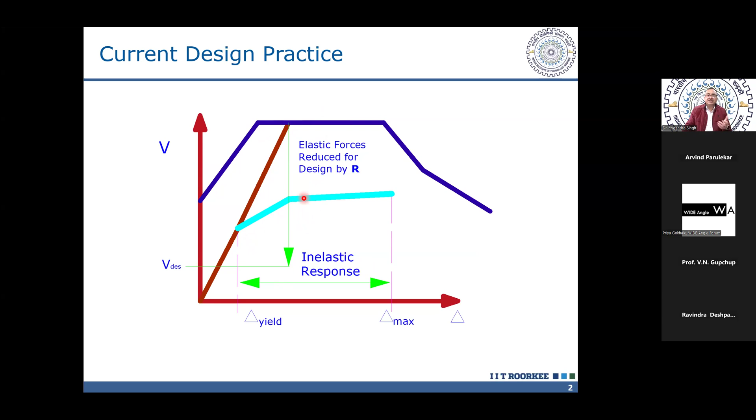So this is going to cause damage in my structure. The problem is that this damage is not known, we can't exactly estimate what will be the level of damage. And that's the limitation of the current method.

If we ask these questions with the current method, there is no answer as to what is the expected performance of the designed structure. I have designed a building following all the procedures of the code, all the do's and don'ts, although those are quite difficult to follow many times.

But even if I have followed all those, and the owner asks me what is going to happen to the building during an earthquake in the future, it is a difficult question for me to answer, because I do not know what performance or level of damage the structure is going to have in a future earthquake.

Then the next question is, suppose I want to achieve a better performance. Currently, what the code intends is that if it is subjected to a major earthquake, the building will get damaged, but it will be at the verge of collapse. It is not going to collapse.

So what we are trying to avoid is the collapse of the structure, because collapse of the building will cause large damage, large loss of life. So we want to avoid large loss of life.

But even when the structure is damaged to such an extent that it is at the verge of collapse, this is severe damage, and there are injuries and some fatalities as well. Only thing is that we are ensuring that the structure is not collapsing. Naturally, this may not be acceptable to many owners if this scenario is explained to them, as to what is expected from the building if it is designed as per code.

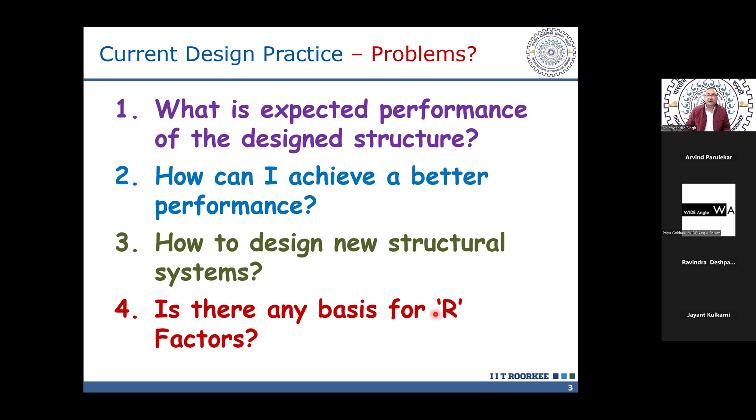These questions can be answered using this methodology, which we call performance-based seismic design, PBSD. In performance-based seismic design, we can target a performance and we can target a hazard. So two parameters we have to decide: one is the hazard level, that is, how strong an earthquake we are going to design for, and then under that earthquake, what level of damage we are going to accept. So one is the hazard level and another is the damage level or the performance level.

The objective of the design is expressed in terms of these two parameters: this performance under this level of hazard. I will explain both to you, how we quantify the different levels of hazard and how we quantify the damage level. Because defining the damage in descriptive terms is easier, but design cannot be done in descriptive terms. We need to define it in terms of some engineering demand parameter. That engineering parameter, which we use to define the damage, is a little more complex. We have to understand - I will give the guidelines, whatever guidelines are available in literature, I will share those with you also. Using those guidelines, we can decide what engineering parameter we can allow if I am targeting a particular level of damage or particular performance level.

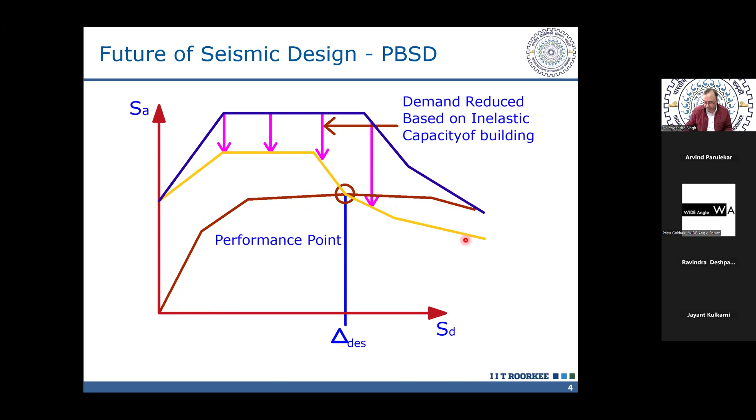So how to obtain this full load displacement behavior, that is actually our objective today.

As I said, in performance-based design, we have a performance objective, and that objective consists of two levels: one is the performance level and another is hazard. So we express a particular performance level corresponding to a particular hazard. And we can have multiple performance objectives also.

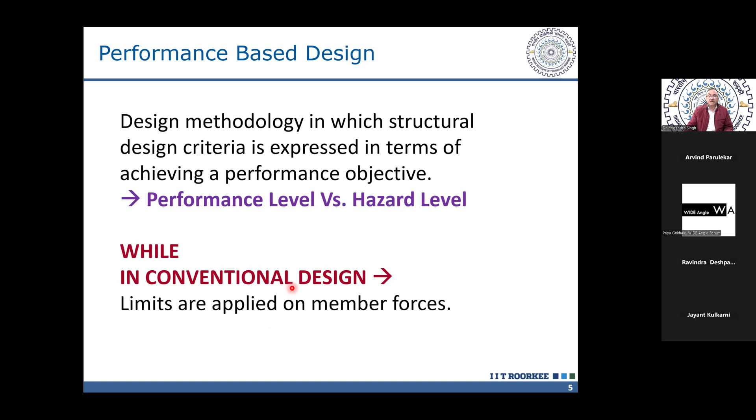I will explain that. In contrast, the conventional design which we are currently following defines certain limits on the member forces. We calculate the demand on the member forces, and that demand is a reduced demand. Then we design our members so that demand is satisfied. Here we are not trying to estimate what the actual performance will be, how the building is really going to perform. That's the limitation.

So these performance objectives are of two types: one is the structural performance level and another is the non-structural performance level. Structural performance level relates to components which support the gravity and lateral load of the structure—members which resist vertical gravity load and lateral loads like wind and earthquake. But in addition, we have a number of non-structural components also. So we have to define the performance objective in terms of both structural and non-structural performance.

For example, when designing a hospital, merely having a building which is not damaged and withstands the earthquake is not enough. The hospital should be functional, and a functional hospital requires functioning of all services—oxygen lines, water supply, vacuum lines, sewage, that's very important, that should also be functional. And power supply too, because after a major earthquake there may not be power supply in the city, so we have to make arrangements for standby power supply so the hospital remains functional even without the city grid.

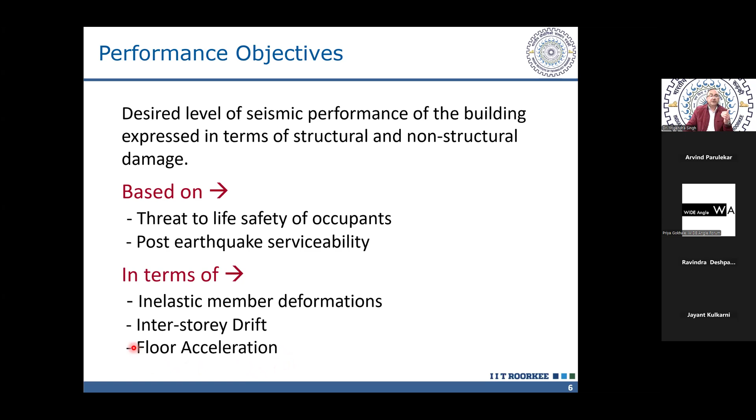And in some cases, floor acceleration. When equipment is mounted on the floor, its anchorage and performance depend on floor acceleration. The ground motion gets amplified as it moves from the ground towards the roof, and at each floor level there is amplified ground motion. That amplified motion should be controlled so that the equipment needed after an earthquake remains functional and its anchorage to the floor stays intact, because if the equipment slides, tilts, or overturns, then the operation of the hospital or such building will not continue.

Now, two documents which we will be using in this talk, and which you require. This is ASCE 41. Earlier, up to ASCE 41 2017, the modeling criteria was given in the ASCE 41 document itself. But in the latest revision, ASCE 41 2023, the modeling criteria has been taken out and put into this ACI 369.1 document. So now we have to use these two documents together. If you're referring to an old version of ASCE 41, you can find the modeling guidelines there itself, but in the recent document you have to read ASCE 41 along with ACI 369.1 2022.

Then there are two documents available on nonlinear modeling: one is the PEER/ATC 72-1 document, and the other is the NEHRP design brief, so a guide is there. These two documents will provide you the background, the theoretical background of nonlinear analysis.

So as I said, we have to define a hazard level and a performance level. Hazard level is defined in terms of return period. Earthquake is a rare phenomenon, and like all other natural phenomena like flood, this is also having a random nature. So like we define a return period in case of a flood, in the similar manner, we define a return period in case of earthquake. And larger earthquakes have longer return periods, or lower probability of occurrence.

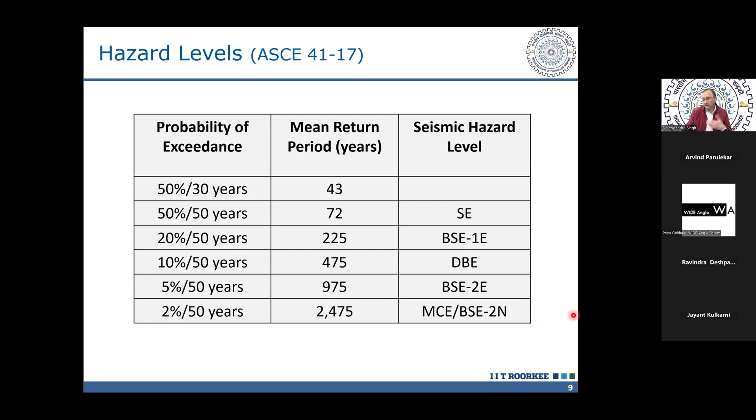When we use the performance-based method, then for each of these levels, we can estimate the expected performance explicitly. And then we can decide whether that expected performance is acceptable to us as owner of the building or as occupant of the building. And if it is not acceptable, we can go for a better performance objective.

As I said, performance levels are defined in terms of structural performance and non-structural performance. Structural performance, SP, or rather performance of structural components: SP1 is immediate occupancy, SP3 is life safety, and SP5 is collapse prevention. In between, these are ranges, so SP2 is actually a range, SP4 is also a range. But 3 levels we commonly consider, especially in ASCE 41: immediate occupancy, life safety, and collapse prevention.

Immediate occupancy, you can understand, means the damage is practically not there. So here also we allow the structure to yield and undergo some inelastic deformation, but that inelastic deformation is limited to such an extent that practically there is no damage, and the structure can be occupied immediately after the earthquake.

And in case of life safety, we accept some damage. So when the structure is getting damaged, chunks of concrete and masonry will be falling, but we have to ensure that large chunks of concrete and masonry should not fall, because if these large chunks are falling, there can be life-threatening injuries.

So some injuries may be there, but life-threatening injuries should not be there. So we try to save the life. There should not be any risk of life loss corresponding to this performance. And then the last one is collapse prevention. This is the minimum performance which we want in any case, because collapse we cannot afford. Collapse will cause large scale loss of life, and that we want to avoid. So in collapse prevention, it is understood that some fatalities are expected.

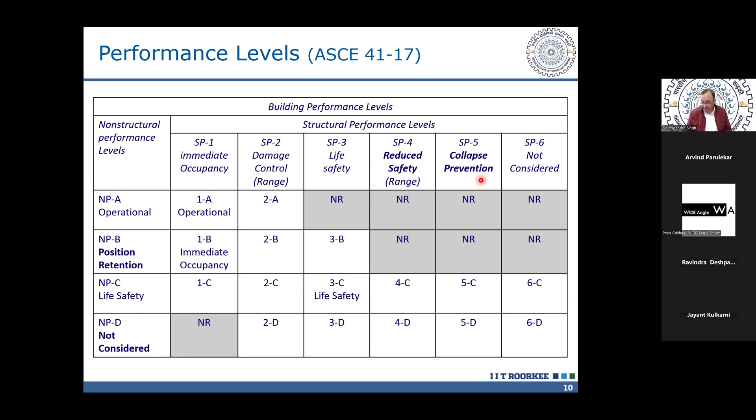It may not sound very comfortable as an owner if I say that I'm targeting only collapse prevention, I'm not targeting life safety, but economically, maybe we have to take a decision that I'm not targeting life safety, I'm targeting collapse prevention. So those decisions are not easy. Those are not purely technical decisions. Those involve economics also. So together with the owner, we have to take these decisions.

Now, recently, our code is being revised. Many of you might have seen this revised code also. And the current code divides the country into 4 zones, zone 2, 3, 4, and 5. So it starts from zone 2 up to zone 5. 4 zones are there, you are familiar with that. And that is based on deterministic seismic hazard assessment. In deterministic seismic hazard assessment, we do not get any return period. That's why the current code does not talk about DBE or MCE or return period, or whether it is 475-year return period or 2,500 years return period. Those terms are not there in the current code.

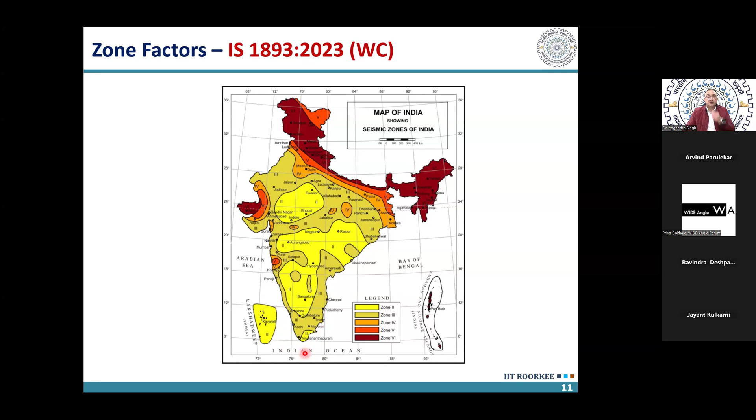Whereas in the revised code, the zonation has been changed. Now there will be 5 zones, starting from zone 2 to zone 6. So there are 5 zones. And you can see that the zonation map has also changed. So the whole of this Himalayan region, Himalayan belt, has gone into zone 6. And the foothills and the plains adjacent to Himalayas have gone into zone 5. And Delhi, of course, remains in zone 4, and perhaps there is no change in Bombay also, that zone number remains same. But the hazard now is also defined along with return period.

In the current code, the zone factor is fixed for one zone: 0.36 for zone 5, 0.24 for zone 4, and so on. But here, different zone factors along with the return periods are defined. So the MCE, which we discussed, corresponding to 2,500 or 2,475 years return period, those zone factors are defined like this. In zone 6, it is 0.75. In zone 2, it is 0.15. So from 0.15 to 0.75, it is varying.

Now, one curiosity you may be having is how this zone factor given in the revised code, or the draft code which is yet to be published, compares with our current zone factor. So the current zone factor is based upon DSHA, deterministic seismic hazard assessment. And if we have to compare it with the probabilistic seismic hazard assessment, then this is the approximate relationship.

The zone factor Z given in our code is the median effective peak ground acceleration, or zero period acceleration, as we call it. It is the value in the response spectrum corresponding to zero period, t equal to 0. Because we multiply by Z to get the response spectrum, our code gives a normalized spectral shape, where the value corresponding to t equal to 0 is 1. So that needs to be multiplied by this zone factor Z, and this is the median value obtained from DSHA.

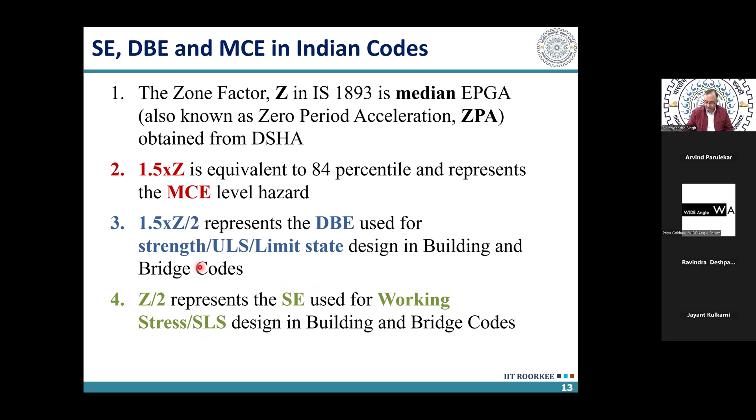So we can compare the response spectra for different return periods with our current code. This value here is currently given as 1, and this is the value I was talking about, ZPA or effective PGA. So the response spectra are normalized with this value, that's why it becomes 1. Actually, our code currently writes this as SA by G, which is incorrect. It should not be SA by G; it is actually Sa by Z, because only when I divide by Z does this value become 1.

In terms of return period, this corresponds to 2475 years, this to 475 years return period, and this to 75 years return period. So if we go back and compare with the new code, this 2475 years value, 0.75 in zone 6, should actually be compared with 0.36 into 1.5. So in the current code, which is still in force, it is the 2016 code.

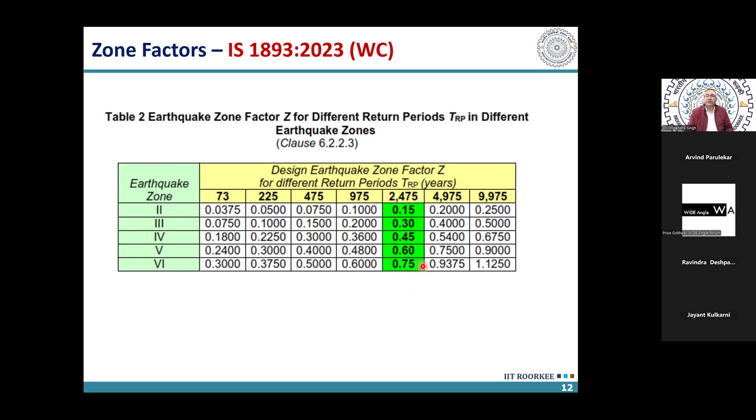But in zone 2, current zone factor is 0.1. Multiplying by 1.5, that remains 0.15 only, so there is no change in zone 2. Zone 5 is close to current zone 5, so 0.54 we can say is our current zone 5. In the new zone 5, it is 0.6, slightly higher. But zone 6 is much higher, compared to 0.54 it becomes now 0.75.

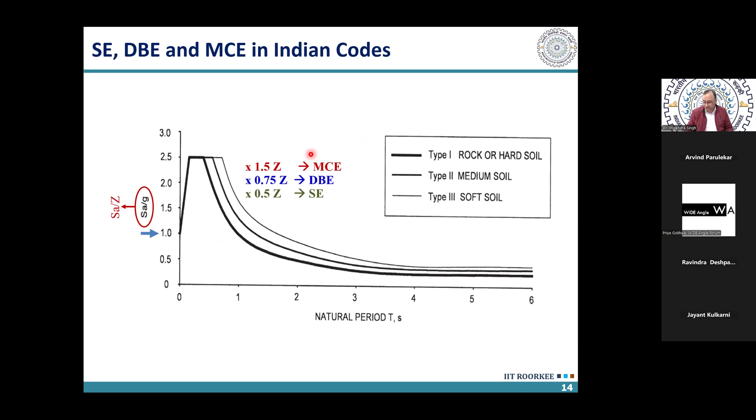So we will be needing these response spectra corresponding to DBE, MCE, and serviceability earthquake in our pushover analysis also. That's why this background was necessary. So with this background of the response spectrum, let's move now to the nonlinear or inelastic behavior of structures.

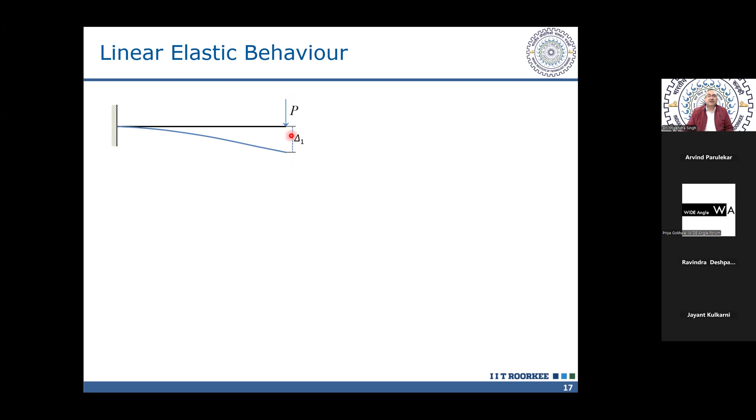So what do we understand by inelastic behavior of a structure. Let's take an example of a simplest structure, that is a cantilever. It is subjected to a vertical load P here. So under this load P, it will deflect. Let us say this deflection is delta 1, and I can plot the load versus displacement curve like this. So under load P, I am getting this delta 1, and this behavior can be represented by a straight line.

We know currently our stiffness, which is P over delta, that is constant, or the relationship is P is equal to K delta, that is the relationship of a line. So this we call linear behavior. This relationship between P and delta is linear. If I increase P further, the displacement will increase linearly and it will continue.

So with our current analysis method, if we continue the analysis, the displacement will continue up to infinity. So I can go on increasing P, the displacement will go on increasing, and the displacement can go to infinity. But that's not the real behavior, we understand. So this is the limitation of linear behavior, that we keep the proportionality of displacement and force till infinity.

And suppose I start unloading the structure, then it will follow the same path. And if I apply the load in the opposite direction, then it will continue like this up to minus infinity in the other direction. So the relationship is linear. That's why we call this method or this behavior as linear. And it is following the same path in loading and unloading and coming back to the origin when P is equal to 0. So there is no permanent displacement. This we call elastic behavior.

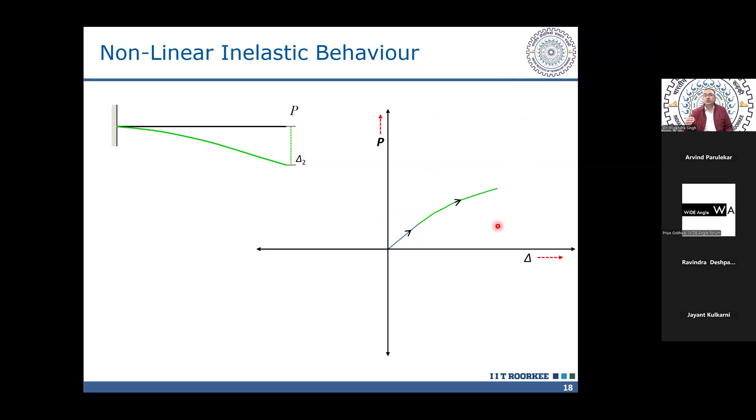In case of normal loads, that is gravity load, dead load, live load, and wind load, we limit the force within this range. So analyzing the structure, assuming it to be linear elastic is all right. But in case of earthquake, actual load is much more than even the capacity. So the structure is bound to go into inelastic and nonlinear behavior. So this is nonlinearity because the relationship between P and delta does not remain linear.

And if I do unloading now, it will not follow the same path. It will follow this path. And you can see that the area below the two curves, the loading curve and the unloading curve, is not the same. The area under the unloading curve is less than the area under the loading curve. So I have done more work while loading it, and I have got less energy while unloading it. So some of the energy has been dissipated, and that energy is equal to the area which is bound by these loading and unloading curves.

And another thing you see, that when I unload the structure fully, that means I remove the load fully, the load is 0 here. It does not come back to the original position. The displacement is there.

So here is a permanent displacement. I have removed the load fully, still it is permanently sagged. So it has not gone back to the original position. And if I want to bring it to the original position, I have to apply the load further in the

opposite direction, in the upward direction, then it will go back to the 0 displacement position. So at 0 displacement position, I have to apply P in the negative direction, opposite direction. And if I continue this in the other direction, I will get the nonlinear behavior again. And if I unload it from here, I will get a hysteresis loop.

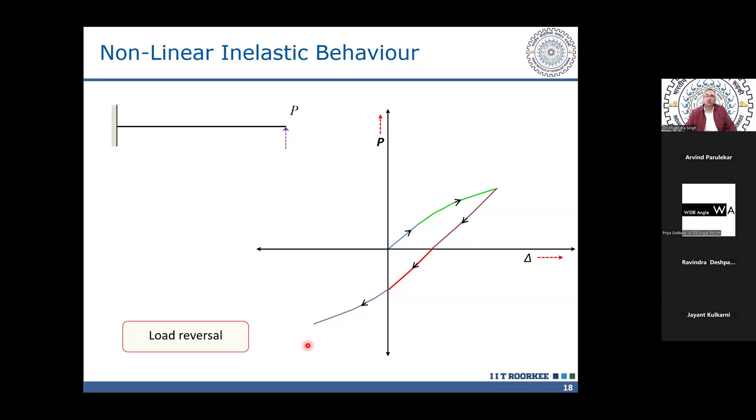But when we confine the concrete, I'm not going into detail about how unconfined and confined concrete behave, but you can see this in any book. When we confine the concrete, its strength increases and its ductility — that means the inelastic range of the material, the strain range in which concrete behaves inelastically — that range increases tremendously.

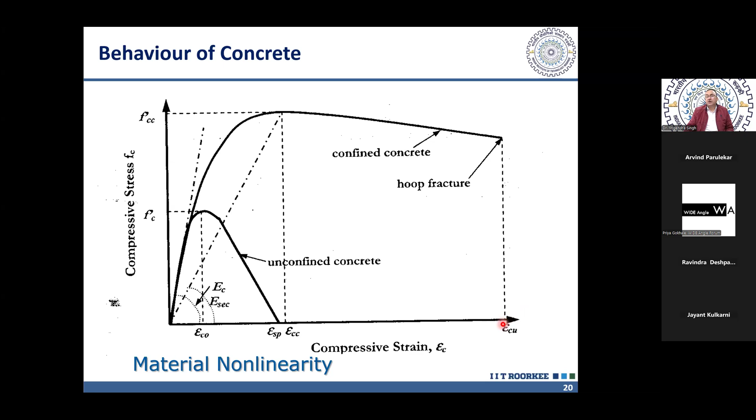So you can see that confined concrete stress strain behavior is like this. Unconfined concrete is very brittle. Confined concrete becomes somewhat ductile, but still not as ductile as steel, because this ultimate strain is of the order of 0.02, 2%, whereas in case of steel it is of the order of 20% ultimate strain.

So I will show you the behavior of different types of reinforcing steel. Mild steel, which we are not using anymore — this bottommost curve is for mild steel. The yield strength is roughly 250 megapascal, and we have a yield plateau. Then there is strain hardening, and the ultimate strain is more than 25%, shown here as more than 0.25.

And in case of concrete, even after confinement, we were able to get 0.02, that is 2%. So much less than what we are getting here.

Now, strength of steel can be enhanced using different techniques which require change in chemical composition, then cold working or thermomechanical treatment, the TMT. Nowadays you are hearing about Fe500 and Fe550. So these are the steels, Fe500 and Fe550, and Fe415. You can see that the strength can increase here, but the ductility reduces.

So ductility here is roughly 14%. And our code IS 13920 says that any steel which is having total elongation less than 14.5% cannot be used. So minimum 14.5% ductility, or ultimate strain, the steel should have to be used in the seismic area. Then only we can achieve ductility in the member.

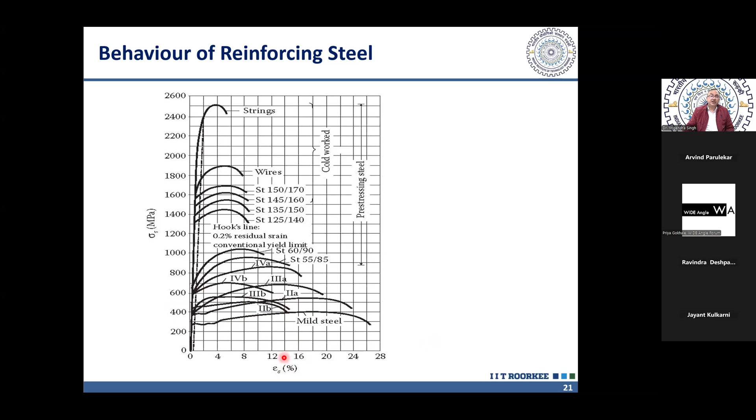And you know how to analyze a section from your BTech first year or second year. You have learned analysis of beam sections. And what we do, we assume a strain profile.

One of the assumptions is that plane sections after bending remain plane and normal to the neutral axis. So the strain variation is given by a straight line, a linear variation. The maximum strain in concrete we allow up to 0.0035 if it is unconfined.

If it is confined, we can go to a higher strain, depending on the stress strain curve of the confined concrete. We assume a level of neutral axis and plot the stress strain curve of concrete and steel. Corresponding to these levels of strain in concrete, we get the stresses from the stress strain curve of concrete. This stress strain curve is plotted continuously because above the neutral axis, concrete is uncracked, and below it, up to a certain depth, concrete is still uncracked. Beyond that, the concrete is cracked.

So this is the tensile limit on the concrete strength, the tensile strength of the concrete, Ft. Up to that, it will be continuous, but we generally do not take this into account since it is quite small, so we ignore this.

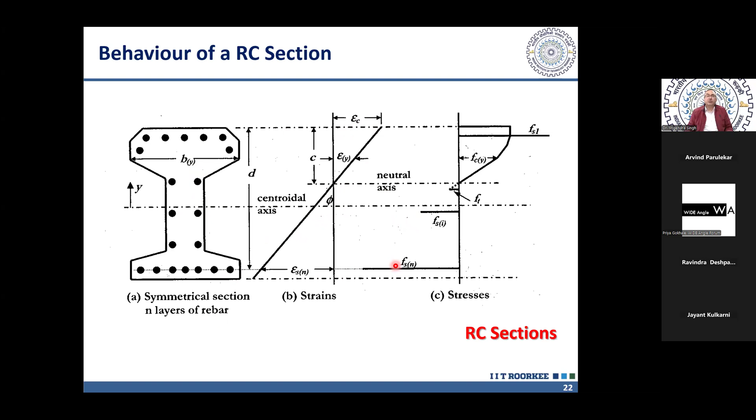By this method, we can calculate moment and curvature corresponding to different strain levels in concrete and steel. By following different levels of strain, we can calculate the values of moment and curvature, and we can plot a moment curvature diagram. This is the first important parameter used in nonlinear analysis, the moment curvature diagram of a section.

The stress strain curve was the property of the material. The moment curvature diagram is the property of the section. The member has still not come into picture, it is just the section. This gives us a very important parameter which we use in our analysis, the stiffness.

Then here you see the stiffness changes. The stiffness is the slope of the moment curvature diagram, and the slope of the moment curvature diagram is equal to EI. You are familiar with the relationship M upon I equal to F upon Y equal to E over R, so 1 upon R is also equal to curvature. So the slope of this moment curvature diagram gives us the value of EI.

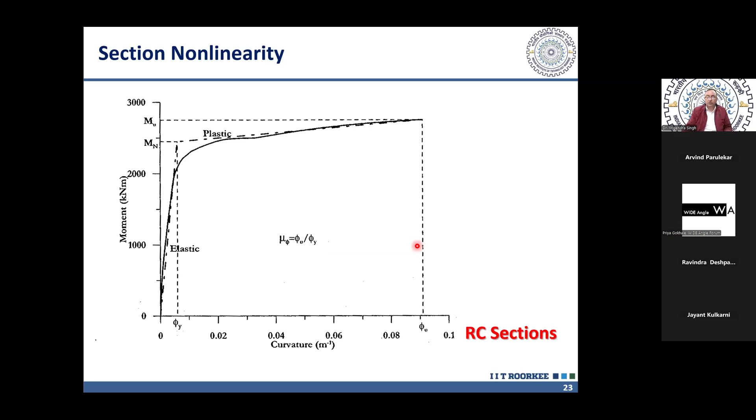But as we increase the force, the moment increases, and this moment-curvature diagram becomes nonlinear. The displacement at the top can be obtained from double integration of this curvature diagram, since curvature is the second derivative of displacement.

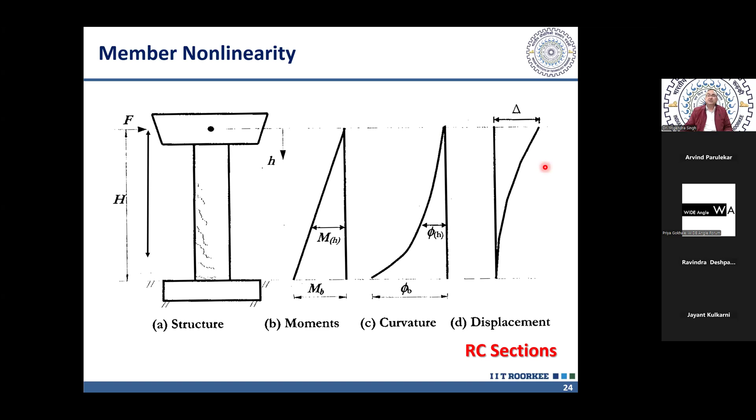We can also obtain this geometrically using the moment area theorem. We take the area of the moment diagram or curvature diagram and then take its moment about this point, which gives us the displacement. But that is valid only while the moment curvature diagram remains linear.

Actually, our moment curvature diagram becomes nonlinear, so we replace it with an equivalent bilinear curve. We consider this equivalent bilinear moment curvature curve as consisting of two diagrams: one is the linear variation of curvature up to yield, and whatever curvature is beyond yield, we lump that in the form of a rectangular diagram at the base of this cantilever.

We call this the notional plastic hinge. In reality, wherever the curvature exceeds phi y, the yield curvature, yielding of the steel is taking place. So steel is yielding roughly at this height, throughout this whole height. But we represent it by an equivalent triangle and rectangle.

The height of the rectangle is taken such that the displacement we get at the top comes out the same as what we get from experiment. This LP, the plastic hinge length, is obtained empirically from experiment by adjusting this length so that the displacement calculated from the moment curvature diagram at the top matches what we get from the experiment.

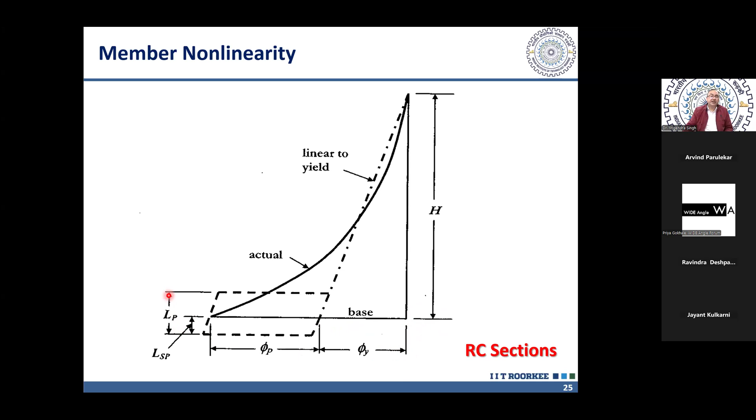This is called strain penetration. So the length of strain penetration is LSP, and LP is at least 2 times this LSP. LSP is given empirically in terms of the yield strength and the diameter of the longitudinal bar, DBL. Then the K factor is obtained like this.

This is the ratio of ultimate stress or ultimate strength of the steel to the yield strength, Fu by Fy. Because larger the strain hardening in the steel, longer length of the steel will yield and longer plastic hinge length we are going to get. And longer or larger the plastic hinge length, more ductility, more energy dissipation we are going to get. So that's why this ratio Fu by Fy is important.

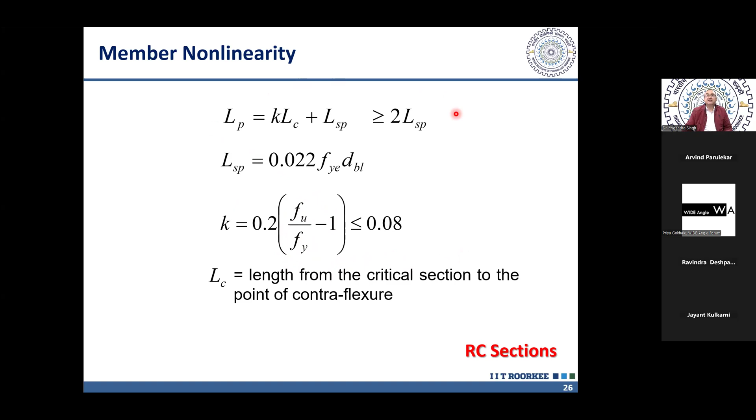If you look at IS 13920, it also fixes a minimum value of this. I do not remember whether that is 1.15 or 1.2. So a minimum value of Fu over Fy is given in our code, and that is to ensure that the plastic hinge length is sufficient, because this length will decide how much energy we are going to dissipate.

Then we can convert curvature by double integrating it at every point or using the moment area theorem. We can convert this into displacement, and from moment curvature I can get the force displacement curve. So corresponding to yield curvature I get yield displacement, corresponding to ultimate curvature I get ultimate displacement, and the ratio of delta U to delta Y becomes the displacement ductility, mu delta. Mu delta is delta U by delta Y.

In case of RCC, cracking of the section causes reduction in the stiffness. So this is representing the cracked section stiffness of the structure, and here the yielding occurs.

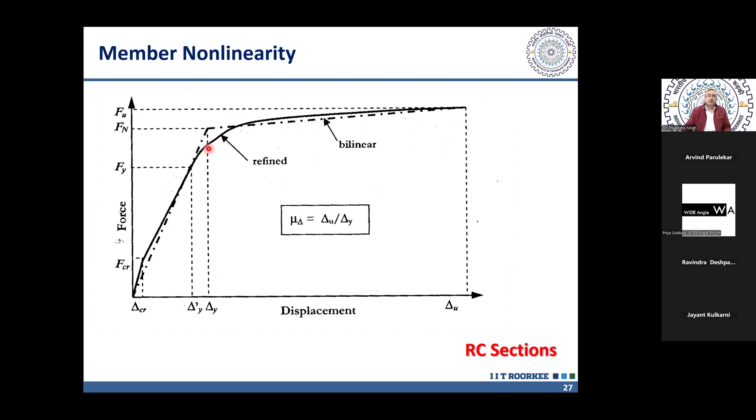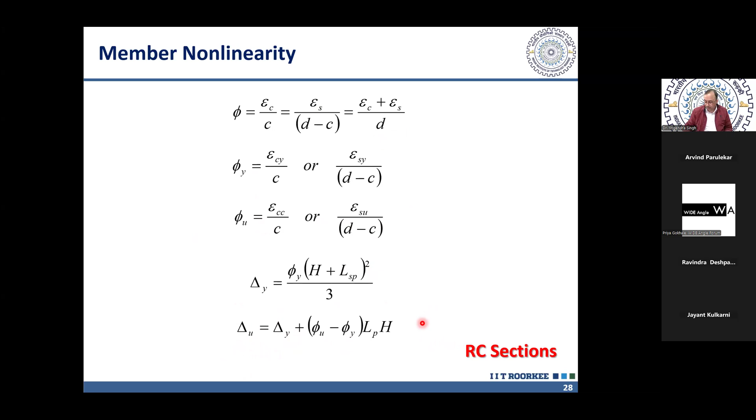We can do some simplifications using geometry, and calculate curvature like this: epsilon c by c, where c is the depth of the neutral axis, or epsilon s by d minus c, which becomes the depth of the neutral axis from steel. I can also write this as epsilon c plus epsilon s by d. Like that, I can calculate ultimate displacement. I will share this slide, and all the slides, with all of you, and you can look into this mathematical derivation. It is simple, but it requires some geometry.

So far we have considered a very simple structure, the bridge pier, which is a cantilever - the simplest structure. Other structures are not so simple. The next, more complex structure is a column fixed at top and fixed at base. We can treat this column, which deforms under lateral load in double curvature, as consisting of two cantilevers - one here and another here.

This we are calling chord rotation. In case of nonlinear analysis, we are talking about chord rotation, not actual rotation, which is del u by del x or del y by del x, where the slope is varying and is not constant. But this chord rotation is unique for one member. That's why we are using chord rotation in nonlinear analysis, not the actual slope, because actual slope will vary from one point to other.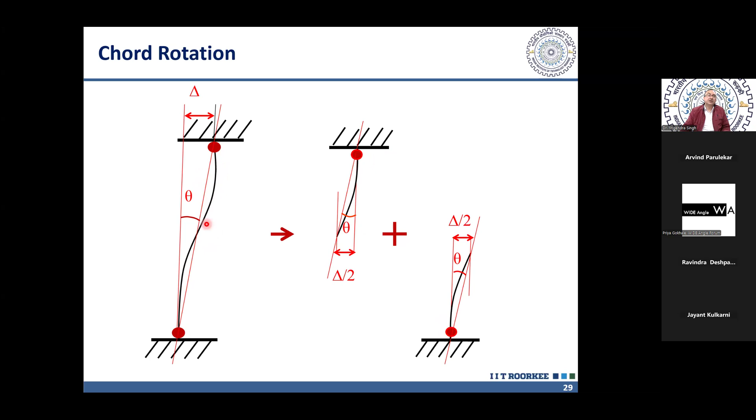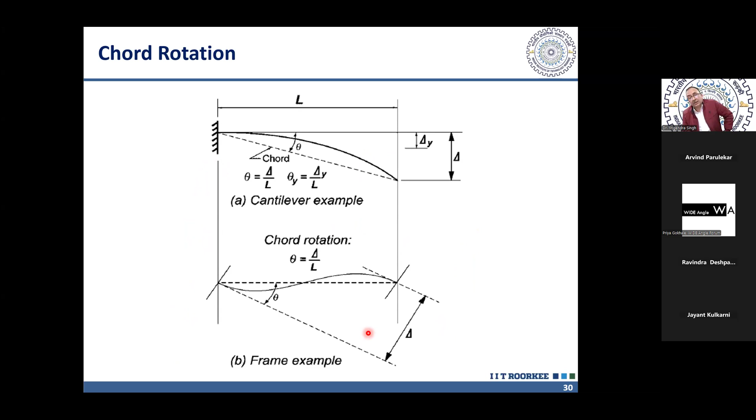This cantilever, this double curvature column, we can represent as two columns having one hinge at the base of this cantilever and another hinge at the base of this cantilever. You can see the chord rotation of this cantilever is same as the chord rotation of this double curvature bending column. So this is the definition of chord rotation given in ASCE 41, and it is to be understood that the theta rotation given in ASCE 41 or ACI is actually chord rotation, not the conventional rotation which you think of.

So far we have discussed the behavior under monotonically increasing load. The load P, which we were applying on the cantilever, goes on increasing in one direction. But in case of earthquake, the force is reversible. Earthquake is reversing its direction in a fraction of a second, and any member is subjected to reversible or cyclic loading like this.

Now, this behavior we call almost ideal behavior. Almost ideal behavior is that the slope of the loading and unloading curve, or the stiffness in loading and unloading, is same, although some reduction is taking place here. This slope is higher and this slope is slightly lesser. So slight reduction is there in case of steel. In a properly detailed steel structure, the behavior is almost ideal.

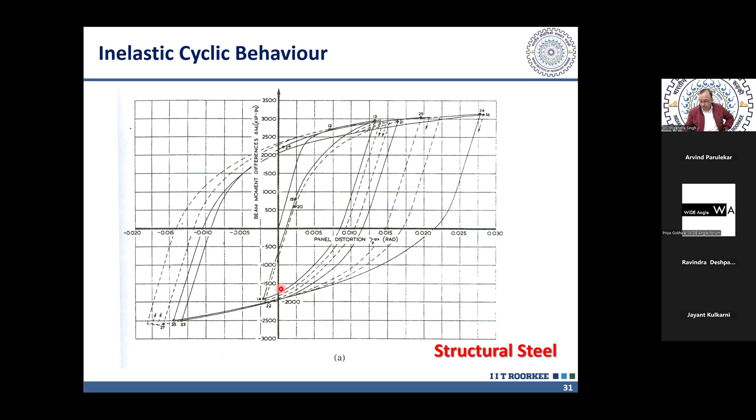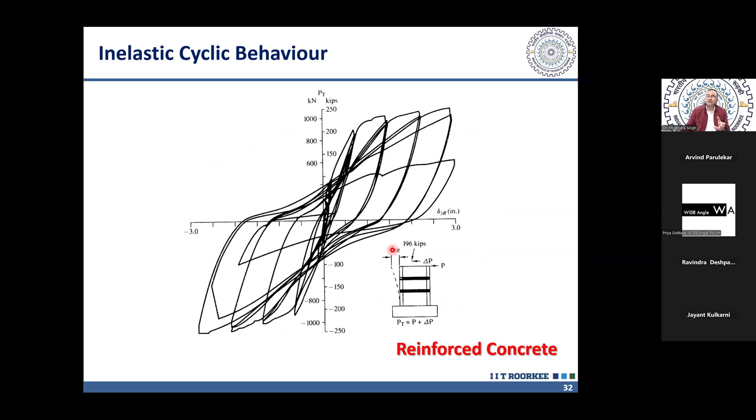So we can see in case of RCC structures, due to this pinching, the area of the hysteretic loop is reducing and the energy dissipated per cycle is reducing. So under the same displacement, it will be able to dissipate less energy. These two effects are in addition to what we get from the monotonic load displacement curve - in monotonic load displacement curve, these effects are not there. But monotonic load displacement curve, I can get very easily using the analysis which we have already done in case of RCC beam design.

In case of masonry, it is even more pronounced. I will not go into the detail. So what we have to do, we cannot take the monotonic load displacement curve as it is. We have to take into account the cyclic effect also, because earthquake causes cyclic loading. So for that, we have to take an envelope of the cyclic load test.

So under cyclic load test, this is the hysteretic behavior. And if I draw an envelope, this envelope is called backbone curve. So this is the backbone curve of a member. And this backbone curve initially, up till, let's say, slightly ahead of yield point, it is same as the monotonic curve. So in this range, it is same, but beyond that, it reduces.

Failure occurs at much lesser displacement than delta U, which we have obtained from the monotonic curve. So I can calculate the initial stiffness and the yield strength using monotonic analysis, but I cannot calculate the plastic strength or the plastic deformation capacity using monotonic load. So this we have to keep in mind.

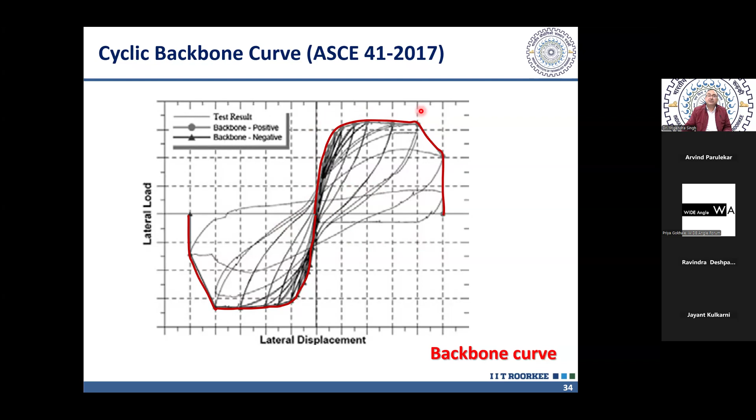Using section analysis, you can calculate only strength, yield strength, and the initial stiffness. So from where will we get the rest of the curve? The rest of the curve comes from the experimental test.

And then the member starts resisting the force through catenary action, and then finally steel ruptures here. So point E is the failure. Here the failure or collapse of the member takes place. This is called the capping strength at point C. Before that, it is called pre-capping behavior, and this is the post-capping behavior. So up till point B and slightly ahead of point B, let us say up to here, we can obtain using the monotonic curve. But beyond that, it is to be obtained experimentally. It cannot be done using monotonic curve or section analysis.

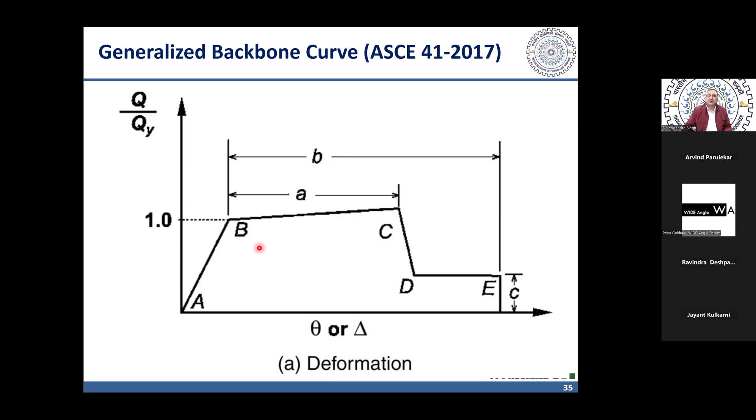This parameter b is the value of rotation again in radian till collapse. So the value of A, B, and C is the residual strength as a ratio of yield strength. So if yield strength is 1 unit, this C is a fraction of that, because this is a normalized curve, divided by the yield strength. So this value actually represents the yield point, and the corresponding strength is the yield strength. So the value of A, B, C is important.

And what ASCE 41 gives us, first the cracked section stiffness of different members. So in case of beams, it is 0.3 times the gross stiffness, EC into IG. And here you see ECE, so this E stands for expected strength. And expected strength is FCK plus 1.64 sigma.

So you remember how we obtained the characteristic strength? The characteristic strength is obtained by mean strength minus 1.64 sigma. So expected strength, which is the mean strength, is characteristic strength plus 1.64 sigma. So in case of nonlinear analysis, we will be using expected strength, not the characteristic strength, because here we are not using any factor of safety on strength.

We will be using factor of safety on deformation capacity, on inelastic deformation. We will be controlling inelastic deformation. So we don't need any factor of safety on strength, because strength in any case is to be exceeded by the earthquake. In case of column, it is 0.7.

If the column is lightly loaded, the axial force is less than 0.1 Ag F-CE, where F-CE is the expected cylinder strength. If it is less than 10% of that, then this is 0.3, same as in case of beam. And you remember IS 13920 also says that if the axial force in column is less than 0.1 times Ag into FCK, then we can detail it like a beam. Otherwise, we have to detail it like a column. So the stiffness changes beyond 0.1 Ag FC.

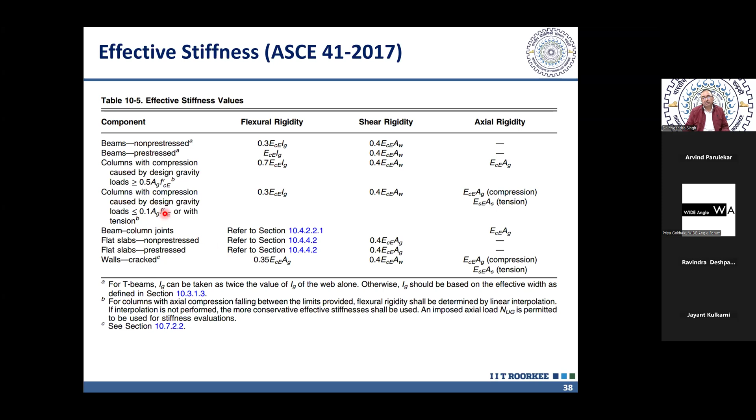Like that, the stiffness for shear walls, beam column joints, all that is available. So using this, we can model our members in a frame building or frame shear wall building. For example, this is a beam which is connected by the columns.

And we can assign the backbone curve to this. The initial portion of that backbone curve can be obtained from section analysis. The remaining portion is to be obtained from ASCE 41 or ACI 369.1. So this is one option.

The software commonly used is ETABS or SAP. After my lecture, one of my PhD students, Mr. Tajul Islam, will demonstrate pushover analysis of a building using the software ETABS. There you can assign this backbone curve.

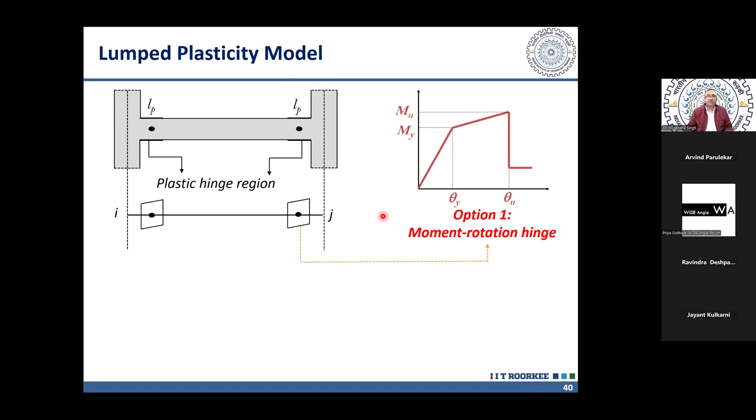Another alternative method is also available, which we will be using for columns - that is fiber hinge. In fiber hinge, the whole section is divided into a number of fibers. Those fibers consist of concrete fibers or steel fibers, and we assign the stress strain curve of the material of which this fiber is consisting.

For example, to a concrete fiber inside the ties, inside the stirrups, we will assign the stress strain curve of confined concrete. To a fiber outside the stirrup, which is unconfined, we will assign a stress strain curve of unconfined concrete. To steel, we will assign the stress strain curve of steel. So we assign these different stress strain curves, and section analysis will be done by the software automatically.

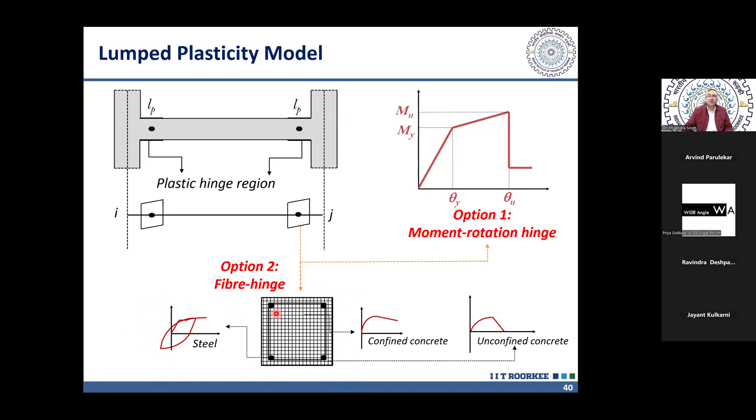So this hinge is not covered by ASCE 41, but you can use the options available in ETABS, and some more parameters you will require if you are doing nonlinear time history analysis. But if you are doing performance-based design using pushover analysis, the simplified analysis which we are discussing today, then you need to define these stress strain curves of steel and concrete.

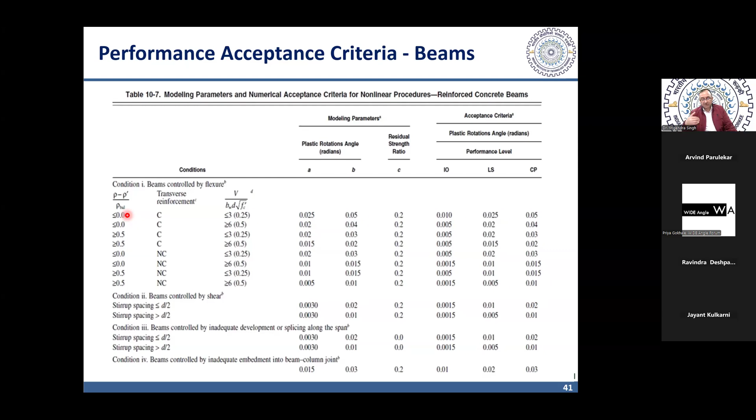3 is in FPS unit, and in case of SI units, for our case, this is 0.25. So if it is less than 0.25, the value will be larger. If it is greater than 0.5, the value will be smaller. So if the shear demand is more, then also the ductility is going to reduce. If the tensile reinforcement is more than compressive reinforcement, then also still it is under reinforced, but the ductility is going to reduce, and so on.

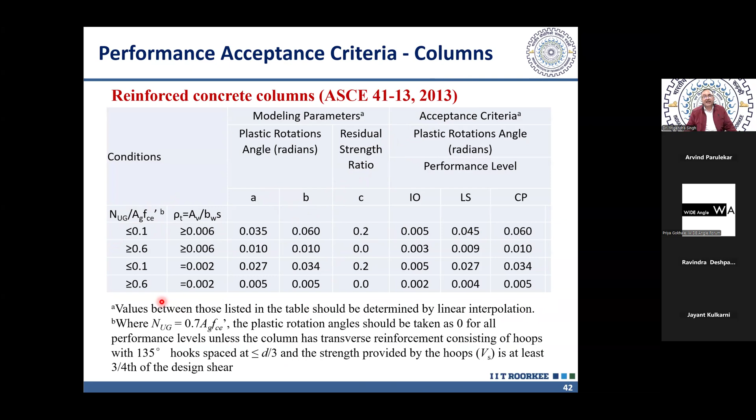Now in ASCE 41 2013 for columns, similar values are given: IO, LS, CP. Actually there was a slight change. So this is the table. Actually it is given like this. So in case of 2017, and now it has been further revised in 2023. So many revisions have come. So currently it is a similar equation.

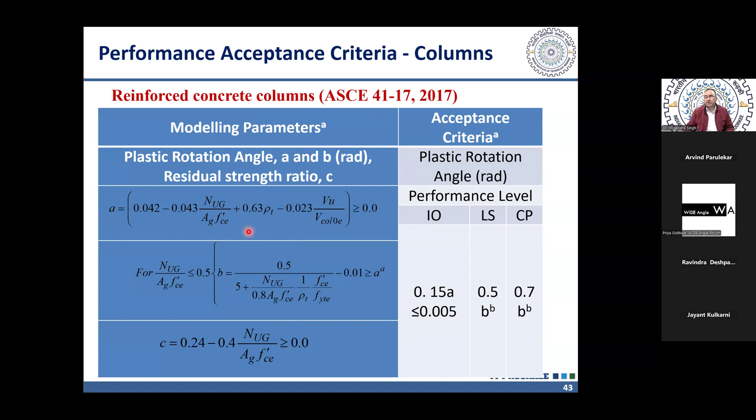That's the only difference. So coming to a practical building, how we are going to analyze that. So first we have to make a model. And when we are making a model, we have to assign some plastic hinges. Rest of the model will remain same as you have been doing in case of conventional analysis. Additional parameter here is assigning these hinges.

So typically these many hinges are required. In a beam or a column, at each joint, there is a flexural hinge—on both sides in the beams, both sides in the column. In case of a beam, it will be a moment hinge. In case of a column, we have to assign a PMM hinge, because in a column there will be interaction of axial force with the moment. So either we assign a PMM hinge, or a fiber hinge, as I discussed, where the cross section is represented by a number of fibers. And if there is a possibility of yielding of the joint, if the joint is not protected using capacity design method, the code provides a method to protect that. If the beam-column joint is made stronger than the beam and column, then we don't need this hinge. Otherwise, we have to assign this hinge also.

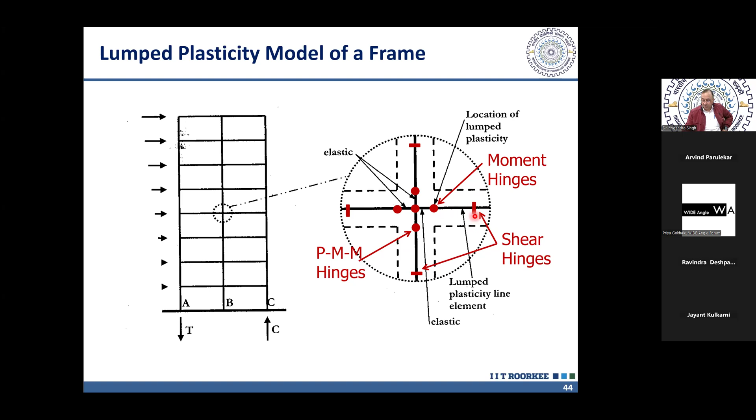And in case of ductile detailed frames where capacity design is followed, shear capacity or shear failure is protected by capacity design, this hinge is not necessary. Similarly, in case of a shear wall, it is like a cantilever column, so the hinge formation will take place at the base, and we will assign either a lumped plastic hinge here or a fiber section lumped plastic hinge. Two types of hinges we can provide.

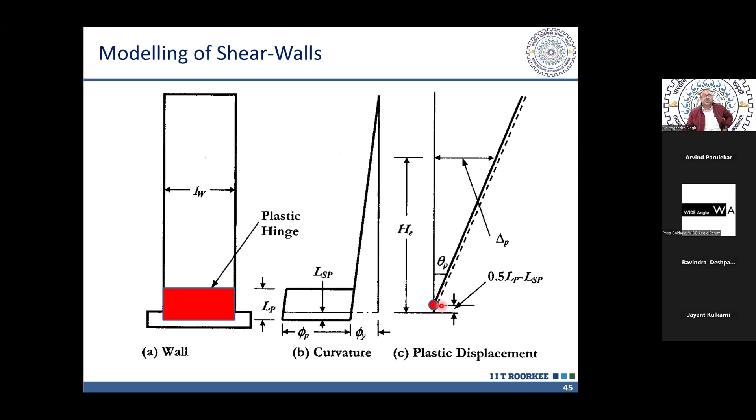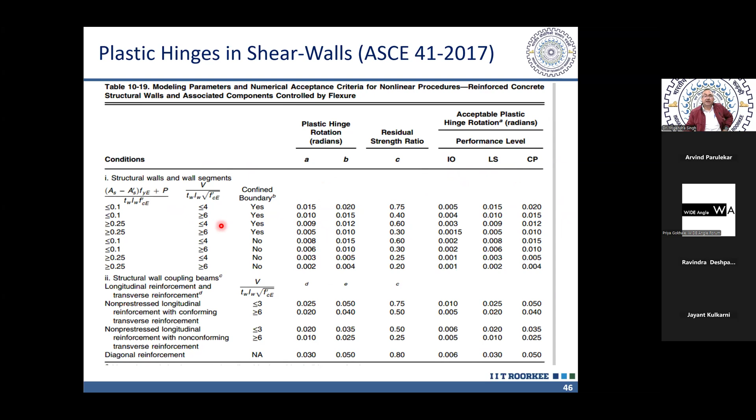Now the software ETABS or SAP provides a facility called auto hinge, in which it automatically uses these values. But what we have seen is that it is not following the code properly. So even when you are using auto hinges, be careful—check those auto hinges using the applicable code, that it has taken the values of A, B, C and IO, LS, and CP as per the applicable case. You have to see which case is applicable for your building, and use the corresponding values of A, B, C, IO, LS, and CP.

When we are using a fiber section, we apply a stress strain curve, assigning it to the material. But in this stress strain curve, we need to consider the reverse cyclic behavior by curtailing the ultimate strain. Under monotonic load, under the monotonic test, the strain in steel will be much larger. But under cyclic load, that strain will be reduced. That reduced strain is called the usable strain limit, and ASCE 41 provides the usable strain limit.

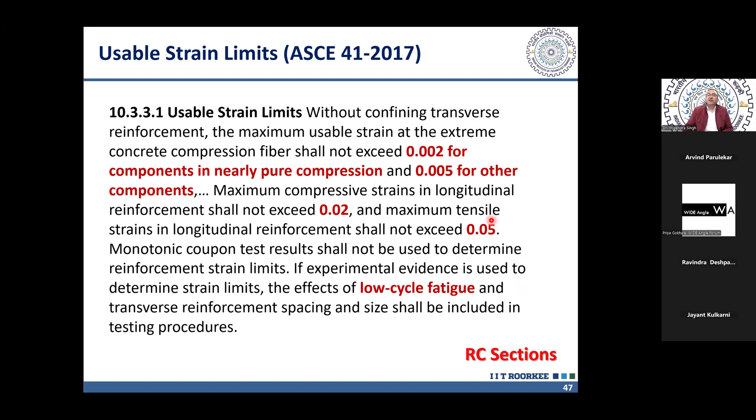For the compression fiber of concrete, if it is unconfined, it is 0.002. If it is confined, then it is 0.02. And in tension, the maximum strain we can allow is 0.05. So remember, IS 13920 gives a minimum elongation of 14.5%, but that 14.5% is under monotonic load. Under cyclic load, it will fail under much less strain, only 5%. So we allow only up to 5% to take into account this low cycle fatigue—when subjected to a large number of cycles, even at such low strain, it will rupture.

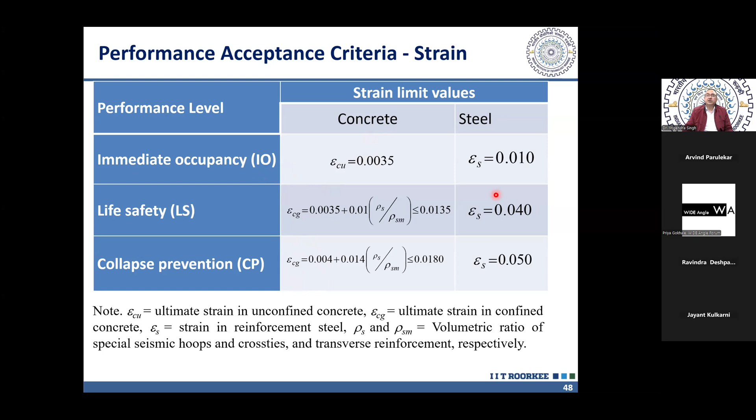When we are using fiber hinges, we need performance criteria in terms of strain, because we will not get plastic rotation or chord rotation, so we have to use strain instead. These values have been taken from different codes, since ASCE 41 does not provide this. So corresponding to IO, LS, and CP, the permissible strain in concrete and steel is given for different performance levels.

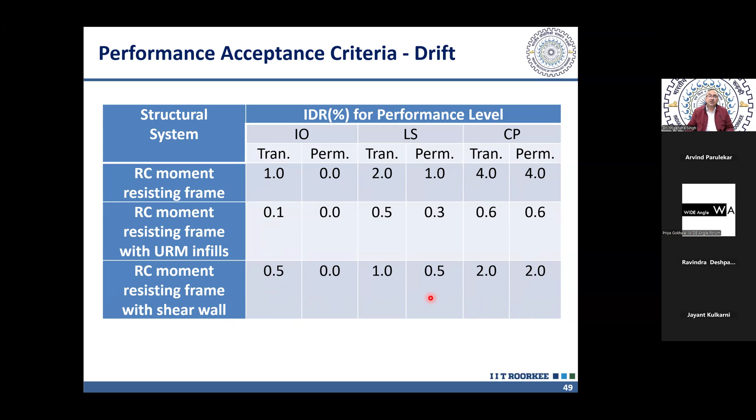When defining acceptance criteria in terms of interstory drift, for different types of structures for IO, LS, and CP, that has also been compiled. ASCE 41 does not give this, but the earlier document FEMA 273, the first document for performance-based design, did provide it. We have taken it from FEMA 273, but now it is believed that interstory drift is not a good criteria to assess performance, so ASCE 41 has dropped it. Some of you may still like to use interstory drift, so this has been compiled from FEMA 273.

Another very common problem in the Indian context is masonry infills, since our RCC buildings invariably have masonry infills. We can represent the infill by a diagonal strut, provided slightly eccentric, so that whatever shear force occurs in the column can also be represented. This requires defining another hinge and another node, then hinge and shear, so it's a little complex. So most of the time, people join it with the diagonals, using a concentric diagonal strut instead of an eccentric one.

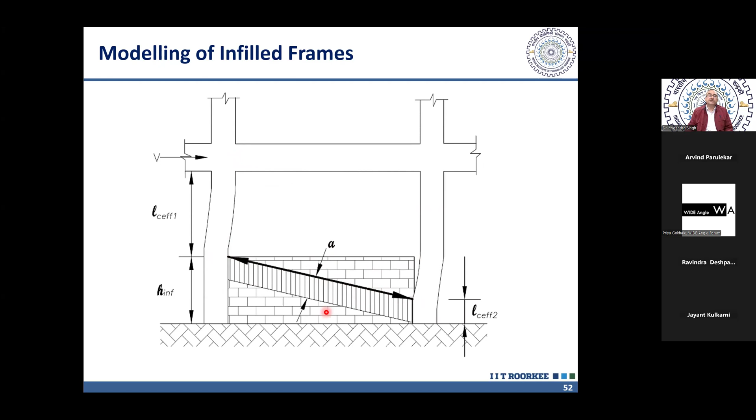If we have partial infill, we can use partial height infill as well. Expressions for the effective width of this strut are available in ASCE 41, and that's how the model looks when modeling with concentric diagonals. Infills are modeled with these concentric diagonals, with flexural and shear hinges. The shear hinge will not be required if we are sure shear failure is not going to take place, because we have protected against shear failure using capacity design. But the flexural hinge is needed.

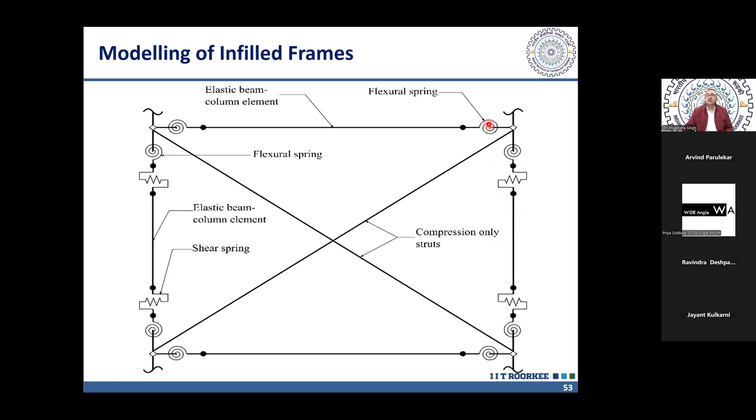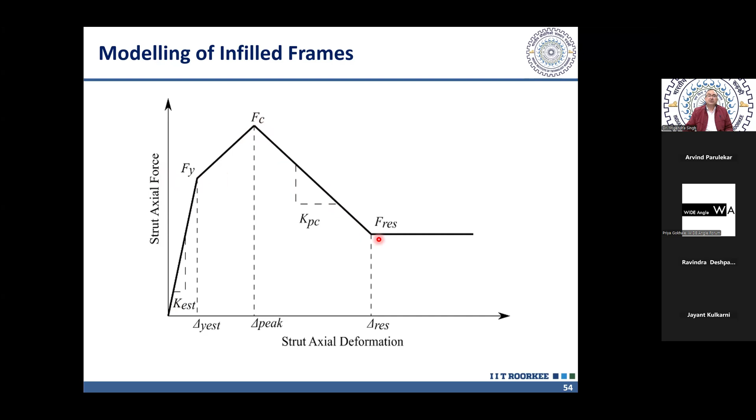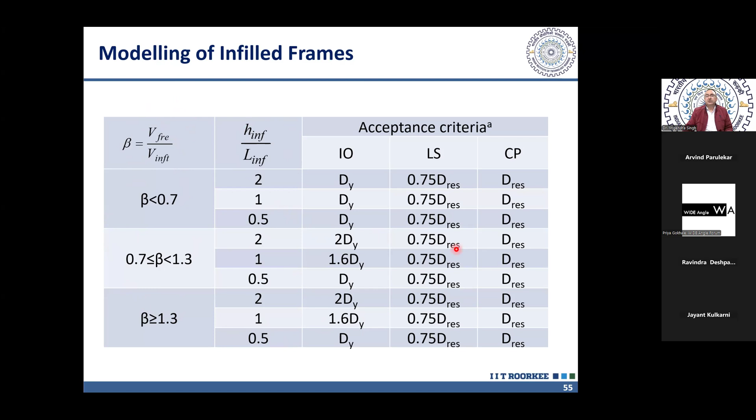Similarly, in case of beams, we are providing flexural hinges. Now, a three-strut, trilinear model for masonry infill is given, with initial stiffness, yield strength, peak strength, and post-peak stiffness parameters available in ASCE 41 and now in ACI 369.1. Depending on the aspect ratio and strength of the frame relative to the infill, you can get these values, and again IO, LS, CP values are given.

That's the background. Now, with 10 minutes remaining, I will tell you how pushover analysis is done. For pushover analysis, we will need all this background we have discussed so far, starting from material nonlinearity, the stress-strain curve of material.

Then we developed section nonlinearity, defined in terms of moment curvature. Then we did force versus displacement behavior of the member, the member ductility, defined by the force-displacement curve. Then we took into account the cyclic nature of earthquakes, because that causes deterioration of strength, stiffness, and ductility of the member, which we took from experiments.

Now, using those values given from experiments in ASCE 41, we can assign hinges to the beams, columns, and shear walls of our RCC building. Then we have to perform analysis of the building. For analysis of any building, as discussed earlier, 4 methods are available.

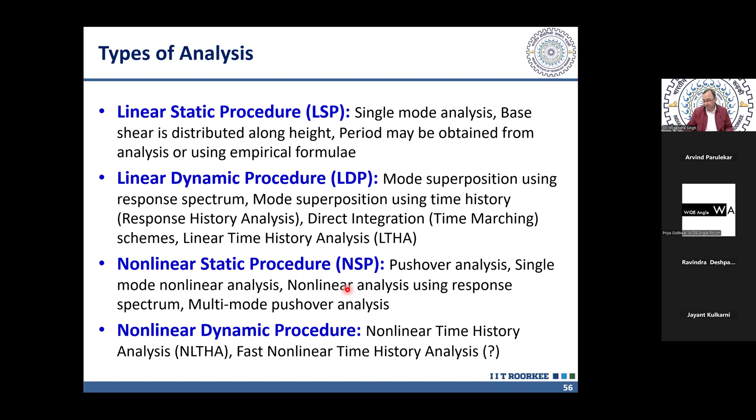Nonlinear static procedure or pushover analysis is much faster compared to nonlinear dynamic procedure. It can be done in a few minutes, while dynamic analysis may require days, weeks, or even months if the structure is really large. So dynamic analysis is quite time consuming and complex. That's why pushover analysis is more attractive, but we have to keep in mind this is an approximate method. So how do we perform pushover analysis?

Then we apply a lateral load, which has to be distributed along the height. This distribution is taken proportional to the fundamental mode, the mode having maximum contribution. That's why pushover analysis, also called the nonlinear static method, is also called the single mode method, because here we consider only a single mode shape. In dynamic analysis of a building, more than one mode participates, so there is contribution of higher modes also. But in pushover analysis, we take the load distribution corresponding to the fundamental mode only, and this can be either linear or parabolic depending on the height of the building.

We do not know the value of the load, so we take any arbitrary force and distribute it along the height. The total force is given as base shear, which is nothing but the summation of all the floor loads. Then I apply these loads, and if I gradually increase this load, I will have a certain displacement at the roof.

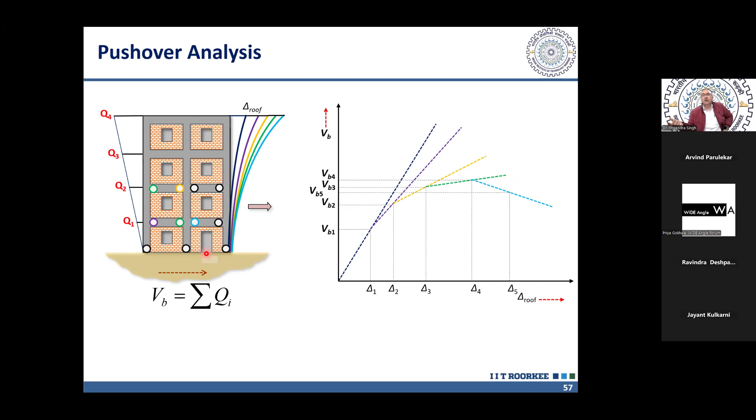So when it becomes a mechanism and P-delta effect is there, its stiffness will become negative. That means the load displacement curve will slope downward. And if we continue further, now it will not be able to take more load, rather it will drop some force here. So force dropping will take place, and finally one of the members here will reach its collapse, or the structure as a whole may collapse.

So collapse can occur either globally, when the whole structure becomes unstable, or locally, when any member here collapses. That is local failure. When does the member collapse? When the plastic rotation at that member reaches point E, or the value corresponding to CP, which we have seen from the backbone curve. So if that value of plastic rotation is reached, we consider that as the failure or collapse of the structure.

Now this curve is important. This is the backbone curve of the whole structure, or the capacity curve. We call this the capacity curve. This curve has three pieces of information about the structure. It is a signature curve of the structure. And what does this signature curve show? It shows the initial stiffness, it shows the yield, and it shows the ductility capacity.

And using this curve, we can determine the performance point or the realistic value of response reduction factor R, which we can use in our design. How do we do that? There are different methods. First, the capacity curve.

This capacity curve is converted into a capacity spectrum. How do we convert this into a capacity spectrum? We had plotted it in terms of base shear on the y-axis and roof displacement on the x-axis. Roof displacement and base shear can be related with SD, spectral displacement. So spectral displacement we obtain using this relationship: spectral displacement is roof displacement divided by the participation factor of the fundamental mode.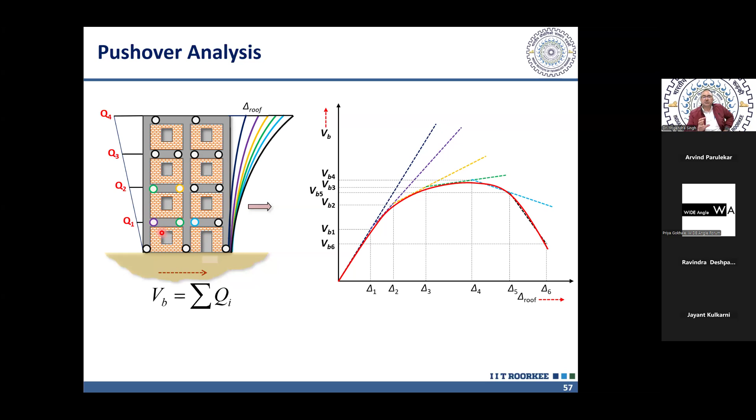So we know the status of the hinges. This is the first hinge forming, and it has yielded here. Here the second hinge formed, and here the third hinge formed.

So maybe here the first hinge might have reached immediate occupancy, then maybe here the first hinge might have reached life safety. And here one of the hinges is reaching collapse, so it is collapsing here.

So from this performance point, I can see the performance of my members. None of the members has crossed IO. First IO is occurring here. So I know that the performance of this structure is immediate occupancy. That's how we determine the performance point using pushover analysis.

C0 is a modification factor which relates the response of a single degree of freedom system to a multi-degree of freedom system. Any response spectrum gives us the response of a series of single degree of freedom systems corresponding to their period. Here we have a multi-story building, which has a multi-degree of freedom system. So we need to relate the response of the single degree of freedom system with the multi-degree of freedom system. This coefficient C0 comes into picture, and it is the participation factor into phi1 at roof, for the fundamental mode.

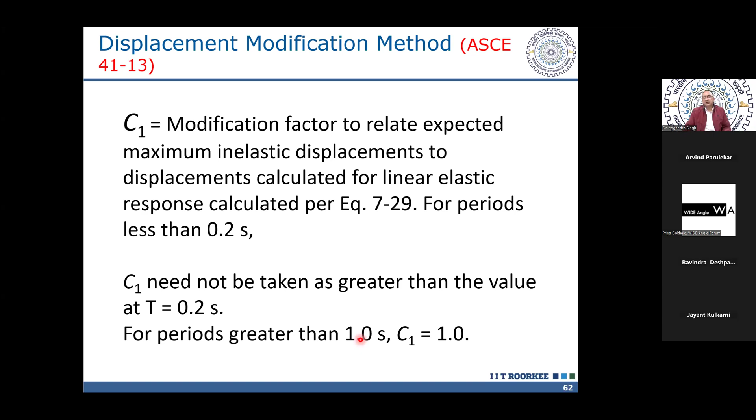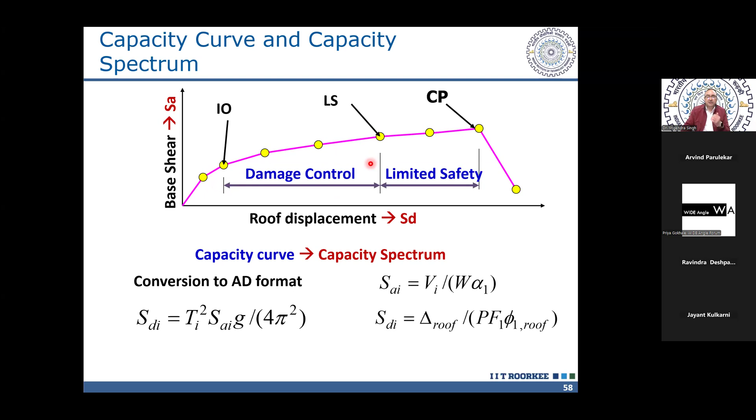So like that, we can obtain the performance of the structure using this simple monotonic analysis, considering the cyclic nature of the earthquake approximately, using backbone curve parameters given in ASCE 41. We are using those backbone curve parameters, which have been obtained from cyclic experimental studies, and in place of time history, we are using response spectrum.

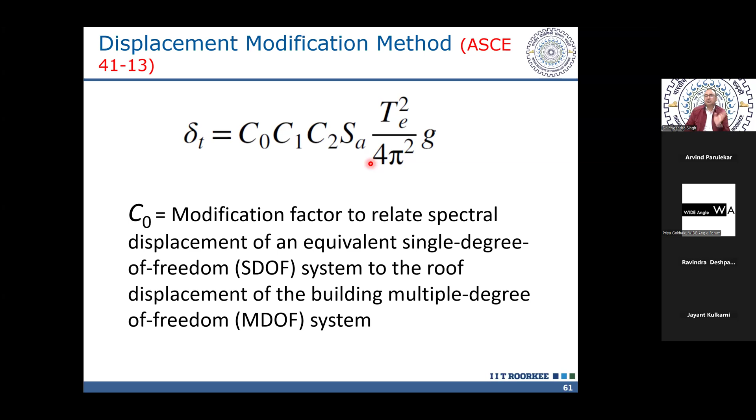Either using this iterative method, which we call the capacity spectrum method, or using the displacement modification method of ASCE 41, we can obtain the roof displacement using response spectrum. Once we know the roof displacement corresponding to the performance point, we can get the performance of the structure. That's all, that's the background for pushover analysis or performance-based design using pushover analysis.